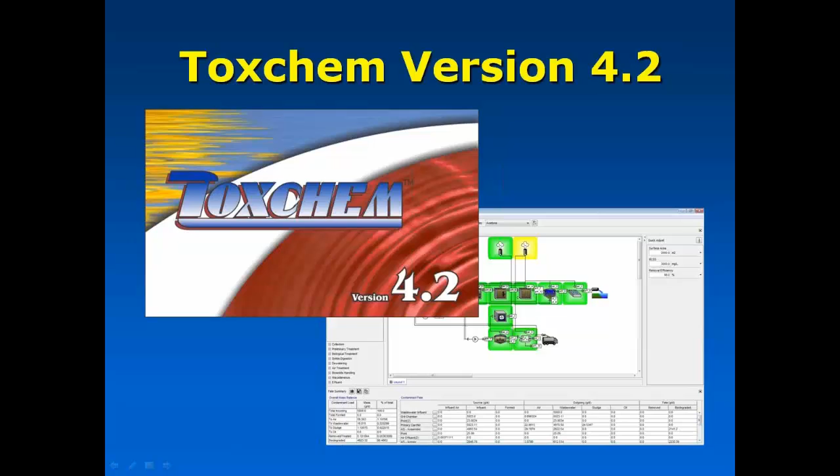So as I mentioned, the purpose of Toxchem is that it's a package that predicts the fate of organic compounds, particularly volatile organic compounds that are of interest, and metals as well, in wastewater collection and treatment systems.

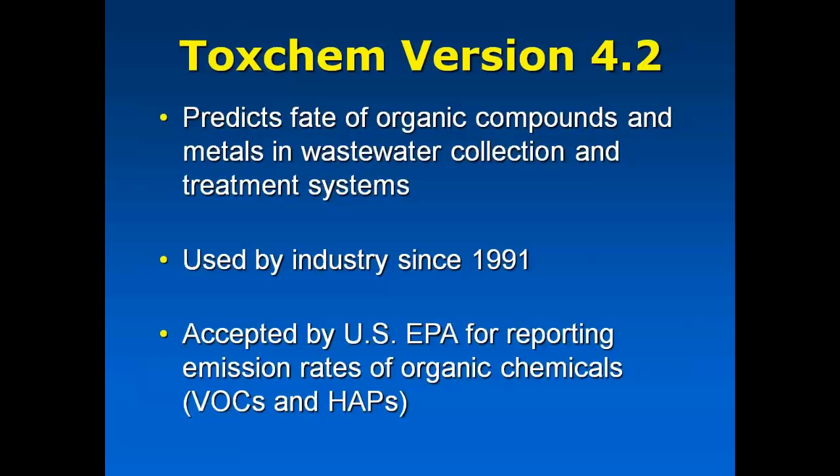As I mentioned, it's been around for some time. It's quite a mature product. It's been in the industry since 1991. Its main use for the most part is that in the US in particular, it's used for estimation and the reporting of air emissions across a number of industries. We have a wide range of users of Toxchem, from consulting companies to industry professionals, universities and colleges, researchers and so on, and the EPA themselves have a license.

These are all different uses across the board, but for the most part, we know that there's a number of people using it to do the reporting of air emissions, but also planning and designing of wastewater process schemes to be able to reduce air emissions. Can we design this plant, or can we operate it differently to get more biodegradation and less loss of particular contaminants, either to the wastewater effluent or to the air?

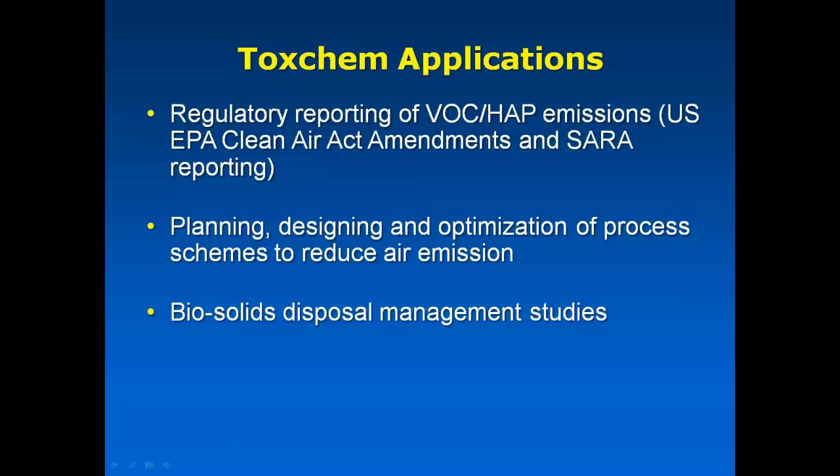There are some people who use it for biosolids disposal management studies, looking at what kind of emissions you're going to get off of different types of biosolids treatment units. A number of people use it in the health and safety sector to figure out what the concentration will be in a capped unit, where there might be some possibility for concentrations to approach hazardous levels or possibly explosive levels. Generally, it can be used anytime you want to track the contaminant mass balance across any type of wastewater treatment.

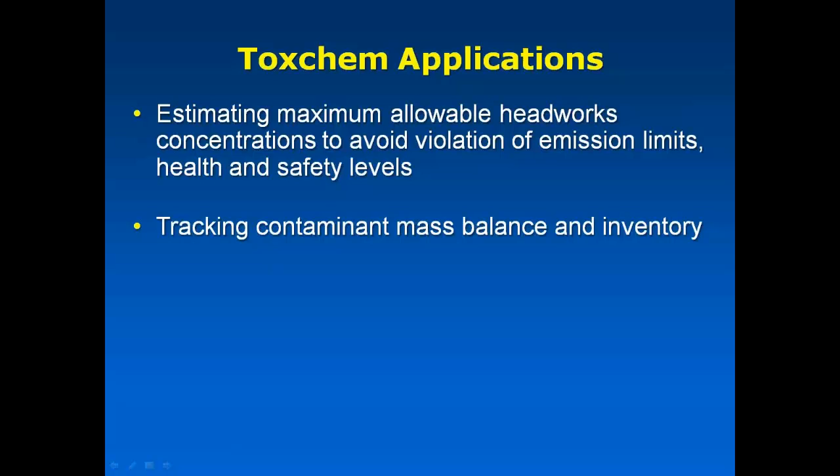So we find that the strengths of Toxchem, as we understand it from our users, is that it's a very mature product, well-tested, well-proven algorithms that have come from a number of different sources and developed over time. We have a very comprehensive model library with over 50 unit processes, which I'll show you here in a moment. Any number of different type of collection system units, wastewater process units, clarifiers, tanks, and different types of wastewater processes.

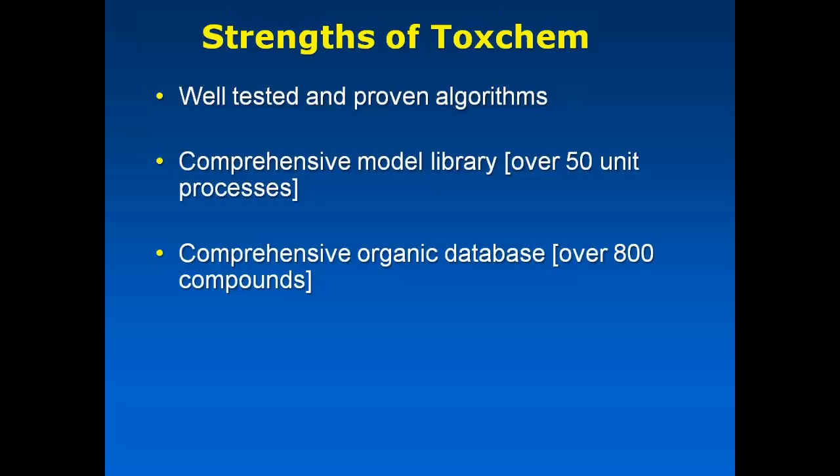And we also have a very large comprehensive organic database of over 800 compounds that you can put into your effluent. We've scoured a number of chemical databases from a number of different sources, so when you sit down to model what's going to happen at your wastewater treatment plant, most likely the things you're looking to put into that effluent will be there, and if they aren't, you can even add new things as you go along.

We've updated the user interface for those who may have seen older versions of Toxchem. It was of a specific style of the time. We've updated it and given it a modern, easy-to-use interface. And of course, it's fully supported by Hydromantis. We offer training and support, and we continue to develop it, and will do so in the future.

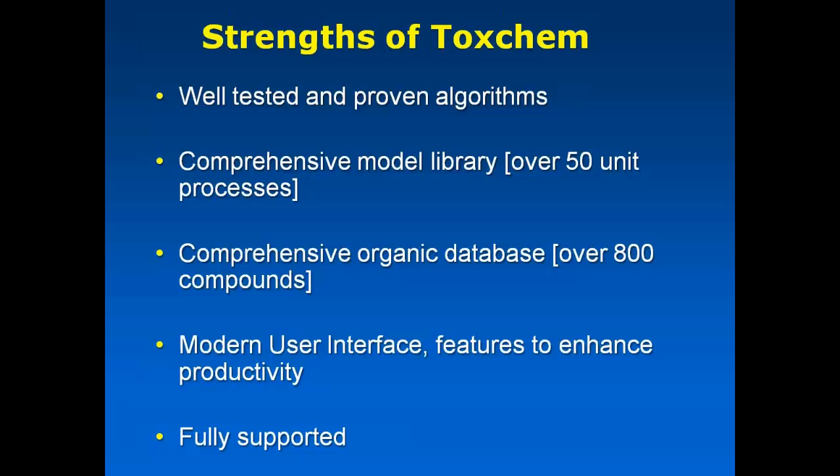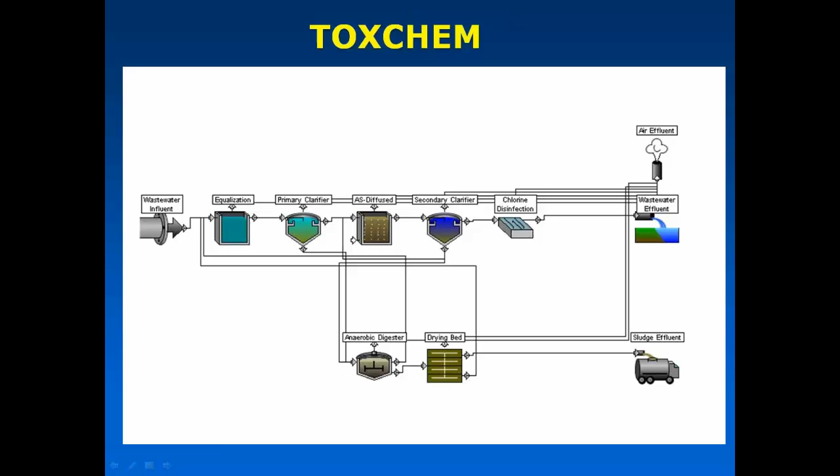So what I'm going to do is just give you a few slides here that's sort of a rough description of what Toxchem looks like and sort of what's under the hood there, just to talk about how we model the individual units, the individual contaminants as you put them into your model. It has several different processes that act upon those contaminants, and it acts upon them each individually. We are, of course, modeling the biodegradation as the stuff comes through the plant.

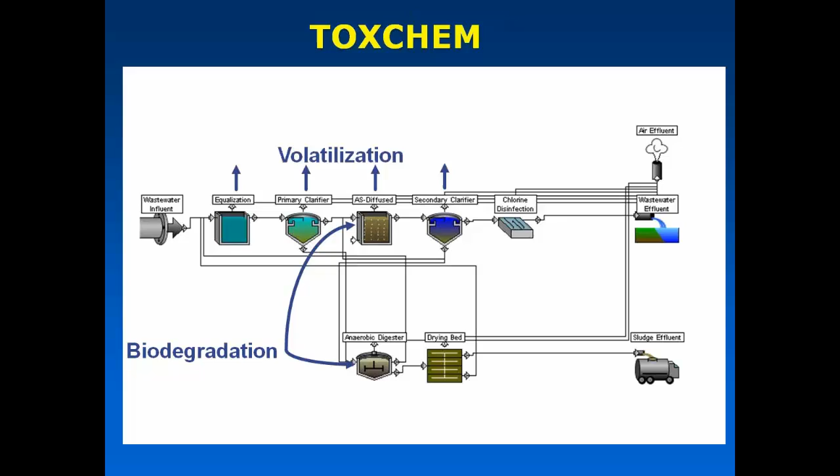Each contaminant that you add has its own biodegradation constant, some for aerobic systems, some for anaerobic systems such as digesters, and there's some level of sophistication in that biological unit. We also calculate through a number of models what the volatilization is, the loss, mass transfer to the atmosphere. And we have sorption models to figure out how much of those components are going to be sorbed onto solids and therefore removed through clarification and treatment and removal of biosolids.

There are a few individual components that could theoretically be produced in a wastewater treatment plant. In any place where that's particularly relevant, we show those. And then we're doing a mass balance on everything, and we can determine after all of those losses have happened, what amount is leaving the plant through the wastewater effluent.

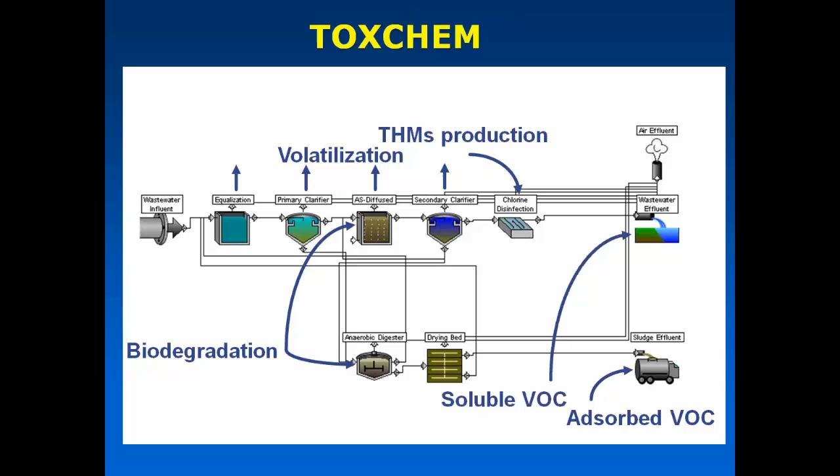So right now, the current up-to-date version of Toxchem is version 4.2, as shown here in this diagram. And as I mentioned, we will have a new version coming out later in the spring or early summer, version 4.3.

Each version of Toxchem allows you to draw out your plant by dragging and dropping a number of individual unit processes from our table, and then you do this on this drawing board. You then hook them all together and fill in a lot of the details for each one of those unit processes. It's all relatively quick and straightforward.

You add your components in, your contaminants that are coming into that plant, and when you run a simulation, we have an overall fate summary down here in the lower left-hand corner that summarizes, plant-wide, how much was biodegraded, how much was lost to the atmosphere, and how much went out in the effluent.

We then have that same kind of breakdown done on a unit-by-unit basis, and this is new in version 4.2. We just added this in the release that came out last fall.

A quick adjust panel means that rather than having to do some calibration or adjustment, a bit of investigation on a couple of the input parameters into the model, say like temperature or size of tank, rather than having to go back and forth, opening menus and changing menu items and then closing them and running the simulation, we've now added this new feature where you can pin a number of those input parameters into this panel, and they'll be there, allowing you to very easily make small adjustments.

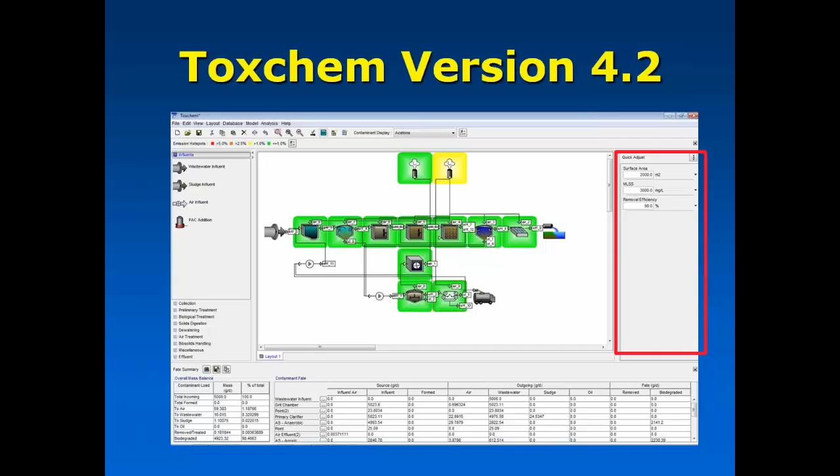We're also very proud of our large chemical database that is used to populate the flow coming into the plant. So I'll demonstrate this and show you some of the details that you can find on this shortly.

We also have what we call our smart visualization of results. So if you want, you can have the results color-coded so that the individual unit processes doing the most release of air emissions to the atmosphere are highlighted in red, with some intermediate yellow and green levels as well. You can control how you want that color coding to happen, what levels you would like, and that can be done on either a mass or a percentage basis.

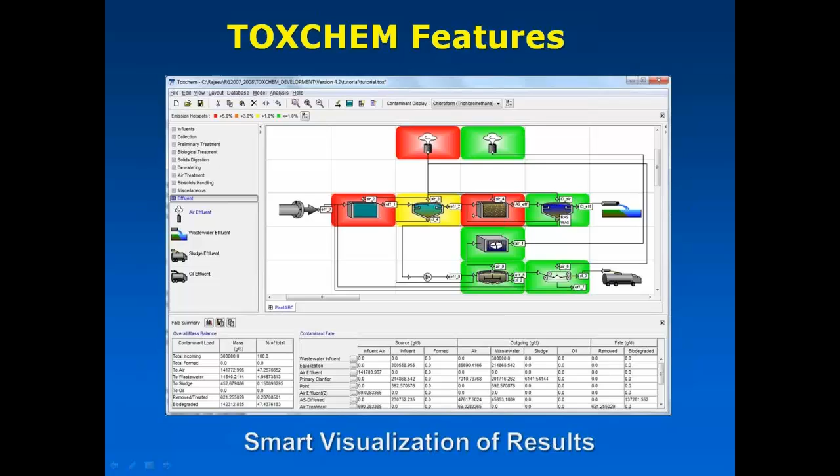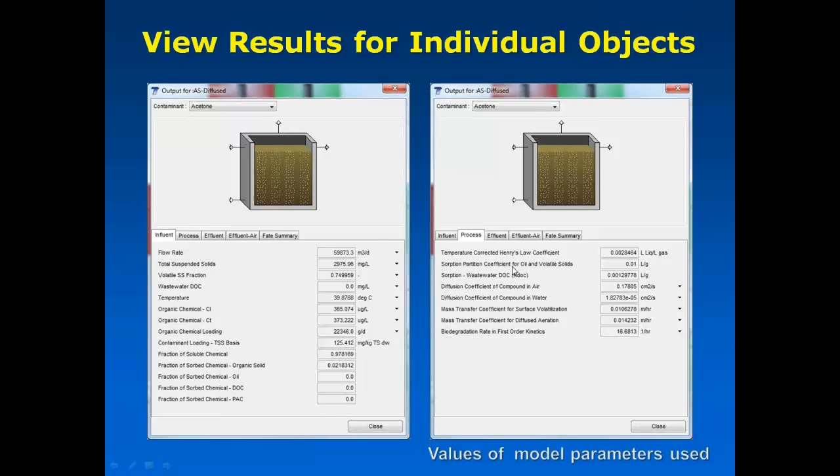So for each unit process, you can take a look at what's coming in once the simulation's done, what models, what values were used. Many of these things are coming from the database and then may or may not be adjusted for things like pH and temperature.

And then you can get an output for each individual unit in terms of what the total air emissions was. This is up at the top here, a percentage of what was coming out for the whole plant, or down below here, total air emissions in a mass flow form.

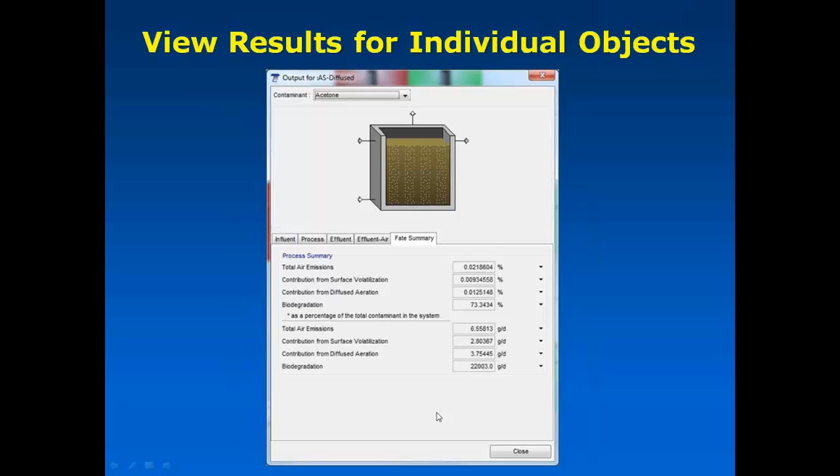So what I'd like to do at this point is hop over to my desktop and quickly demonstrate what Toxchem looks like, and build a plant for you and put some contaminants in it, so you can see how we do this in the software.

So first of all, I'll mention that this is the drawing board that I mentioned earlier. You can see these individual unit processes here on the left. This is our collection of different types of input that we have.

There's quite a number of particular models that you can use for different types of collection systems, open systems, closed systems, drop structures, and so on. We have various types of preliminary treatment, clarifiers and separators and so on, and quite a long list here of different types of unit processes for biological treatment.

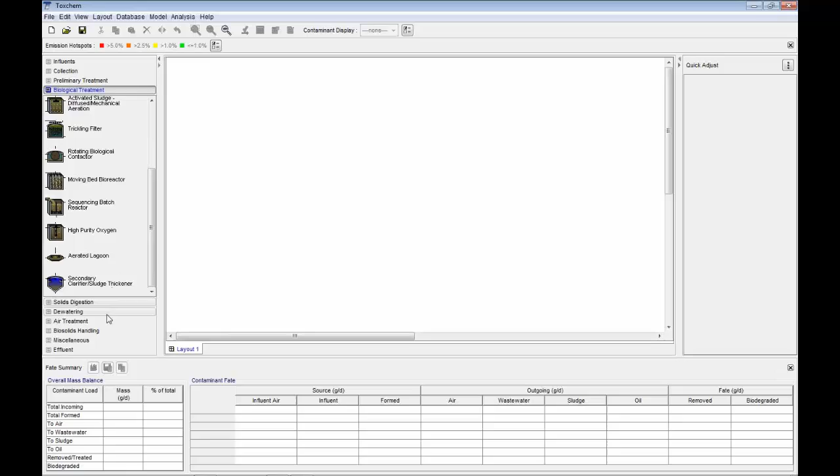That includes sort of conventional activated sludge, mixed and plug flow and so on, and then also some of the things like MBBRs, SBRs, and other specialty units of that type. We have solids for solids handling, digestion, and we even have some air treatment units you can insert as well.

There are different types of solids and biosolids treatment units. These are some of the newer models we just put in with version 4.2, such as the fly ash treatment and the incinerator, and other collections of units used to set up your model in the way that's most realistic for your plant.

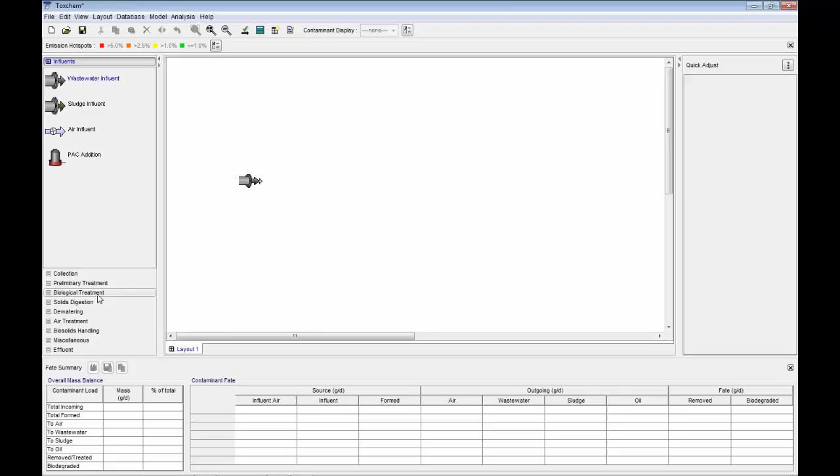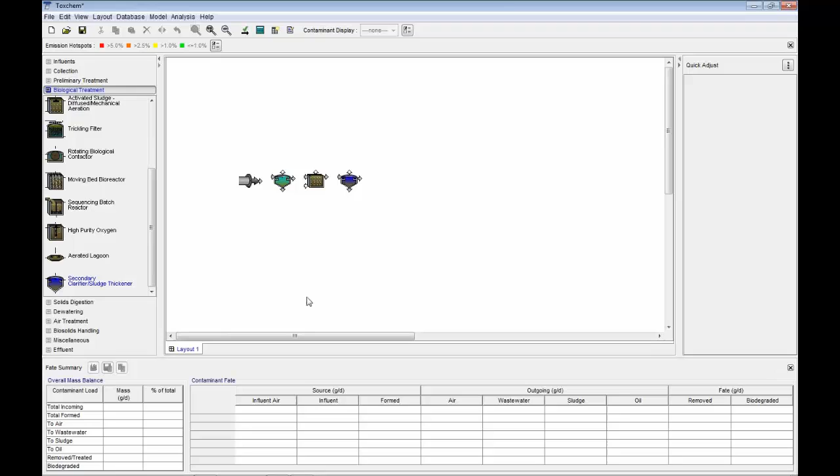So what I'm going to do here is build a very simple wastewater treatment plant. I'm going to drag in an influent, a regular wastewater influent coming into the plant, grab a primary clarifier, and also a biological treatment unit. We're going to pick a diffused aeration activated sludge tank, and slide down to grab the secondary clarifier.

Then I'm going to zoom in on those—there, that's a little better. You'll see that we can hook these things together. You can put them in whatever order you like, and it's somewhat similar to our other software packages, GPSX and CapdetWorks, where you draw out and build a plant of whatever complexity is appropriate, with multiple trains and flow splitting and so on.

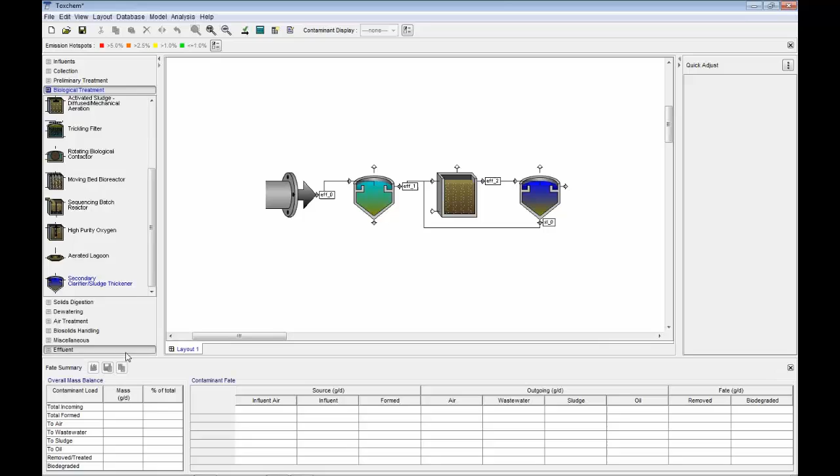The last thing we need to do here in Toxchem is set up some effluents. Because we're focusing on predicting the concentration and mass flow of these contaminants at different types of effluents, that's required. This is supposed to look like a pipe emptying out into a water body, so that's our wastewater effluent.

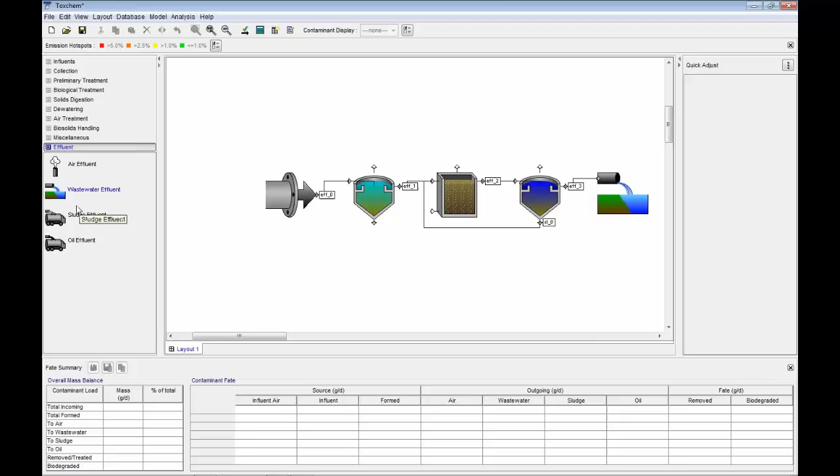We also have to keep track of all our solids, so the primary sludge and secondary sludge come down to this truck doing the sludge haulage. We also have an air effluent, which is a generic unit you need to put all your air effluent into. Any place with an open surface relevant for volatilization goes into one or more of these items, so I'm gathering up all the air effluent into one unit. You can still look at individual volatilization results, but also see them summed in total.

Once you have all of those things in place, we can do a quick check here to make sure we didn't miss any connections. Okay, so we're good.

What we have to do next is specify the characteristics of each one of these units. I'm going to do the influent last, so I'll start by looking at, for example, these clarifier units. We have to specify surface area, depth, and a number of other bits and pieces that are characteristics and physical sizes of those particular units.

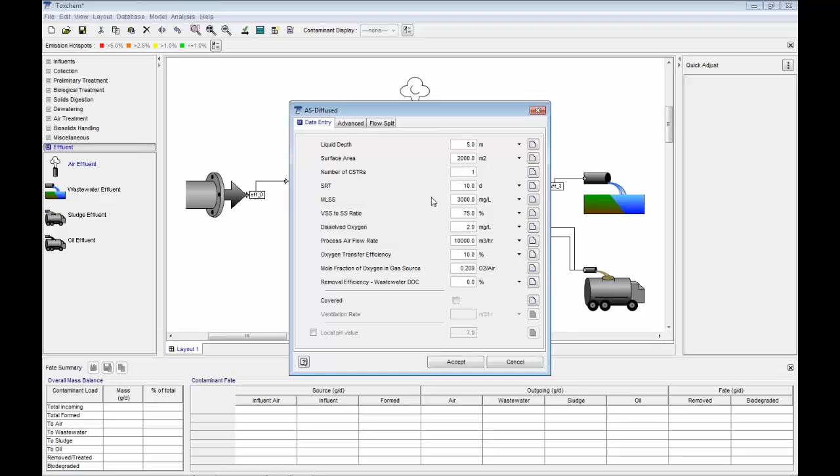There are a few other details here for doing volatilization, and you can use this menu to split the flow if it's going into multiple trains. Each of these menus is different depending on the unit process, but primarily we're concerned with things that allow us to calculate biodegradation, sorption, and volatilization. We'd go ahead and fill all of those in, but I'm just going to leave them at the defaults for today.

Then we have to specify the wastewater influent—here's your flow rate, suspended solids, VSS to TSS ratio, all those kinds of measurements we need for the calculation. Temperature, of course, is important too.

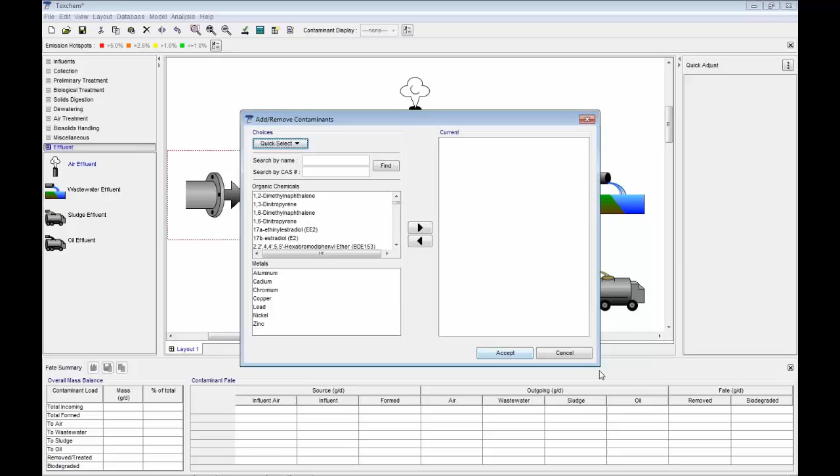Then we pop over to this tab called Contaminants. At this point I can add as many contaminants as I like from our contaminant database. If I make this a little bigger, you can see this table—our organic chemicals table—is the one with the 800 contaminants stored in our database that you can add to the stream. So I'm going to grab a few of these that illustrate different types of fate so we can see.

So first of all, I'm going to grab this estradiol, this natural estrogen, and take acetone, which is highly biodegradable, benzene, which is highly volatile, and triclosan, which is a disinfectant. And let's do a metal as well, so I'm going to select from this table down here at the bottom, cadmium.

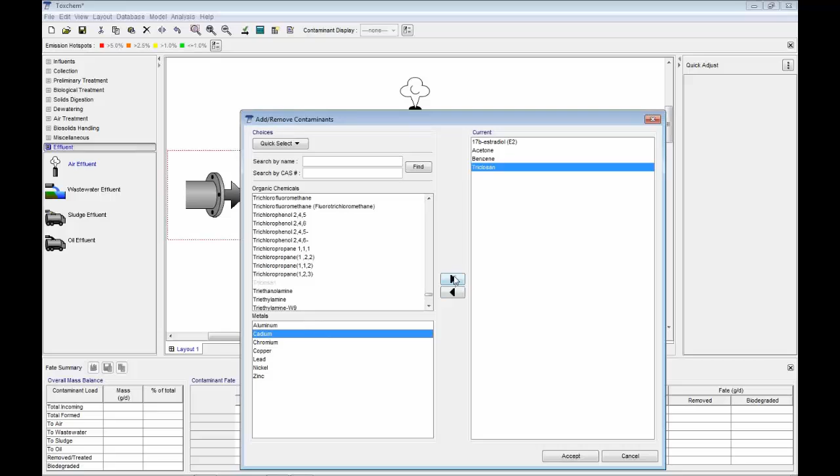So you can put as many as you want, I've seen layouts that have 200 contaminants in there. You can specify their input concentrations here in whatever units you like. I'm just going to leave these all at 100 for now. And then I'm set up to run my first simulation.

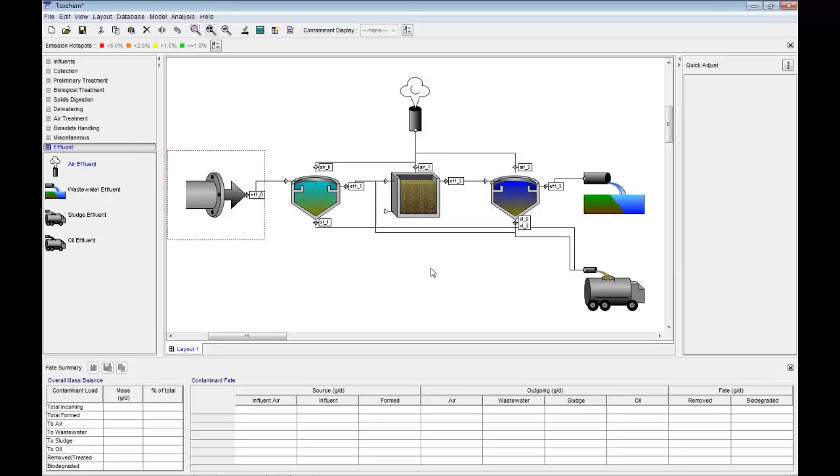First thing I do is click on that button there to do the calculations. It iterates around a few times until it comes to a solution. Now I've got this finished and can look at the results directly, visually, on this screen, by selecting any one of the components I've added to my list. When I flip to benzene here, you can immediately see it had quite a bit more loss to the atmosphere, more volatile emissions than the other things. And of course, cadmium isn't volatile at all.

So if you look in this lower left corner, you can see this is our overall mass balance for the plant. It's a nice quick summary of where everything is going. For this estrogenic compound, for example, we can see that 79% of it was biodegraded, but almost 15% of it was lost to the sludge.

So it was bound to the solids and taken out through the solids handling system. Let's contrast that to something like acetone, which was 95% removed by biodegradation, or benzene, which had quite a bit more, 3 or 4%, lost to the atmosphere. If we look at triclosan, which is a highly hydrophobic compound, this is showing 99% of it was lost directly to being sorbed onto those solids and removed that way.

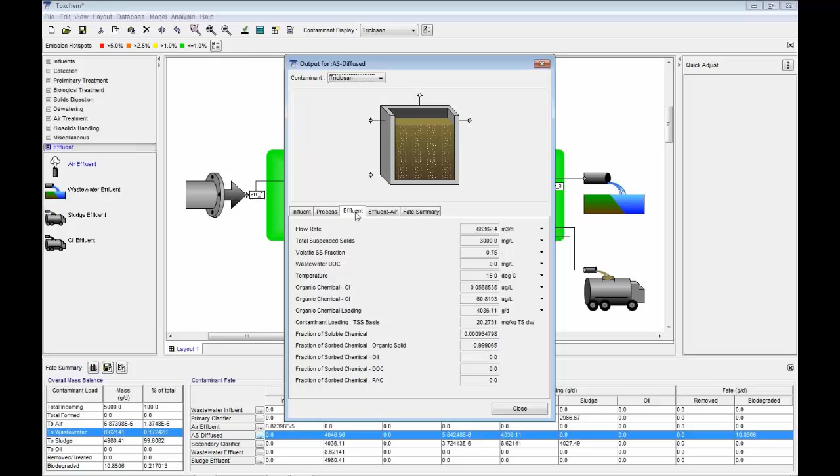You can also get at those images that I showed you earlier here, with more detail in terms of being able to output all the concentrations and flows and other aspects of this model directly right from this table.

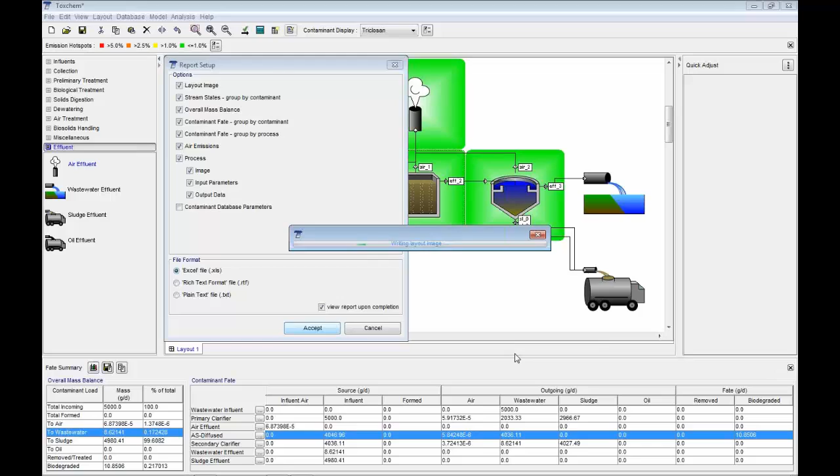Lastly, I'll quickly point out that all of this information can be very nicely exported out by hitting our report button. You can choose which things you'd like to have listed in your report, and there are different formats as well. I'm going to leave it on the Excel file, and just save that out directly. And that popped up over here.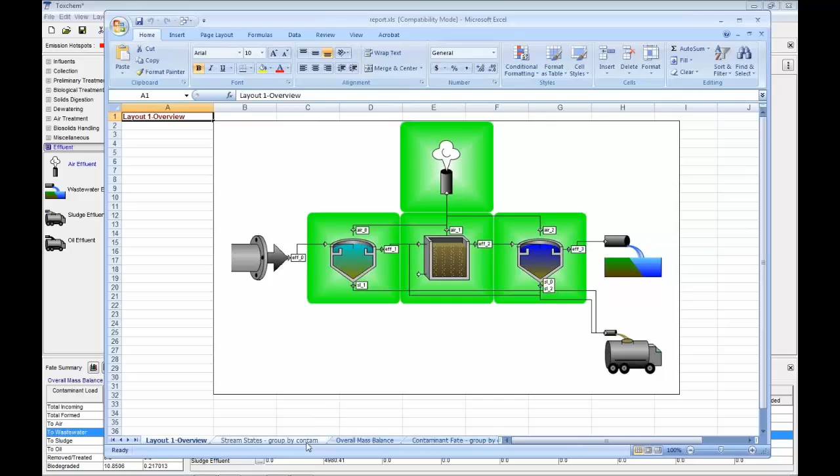I'll drag that over so you can see it. So this is an Excel spreadsheet. This is nice and handy for being able to export images of the graphs and so on directly to your reports that you would like to use.

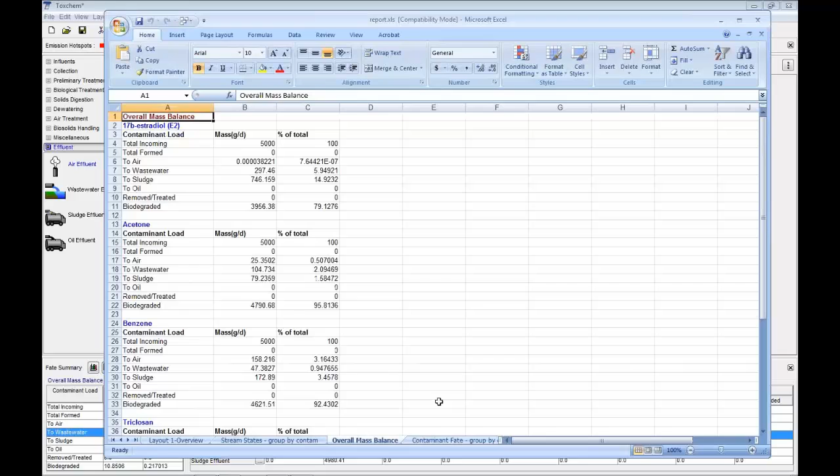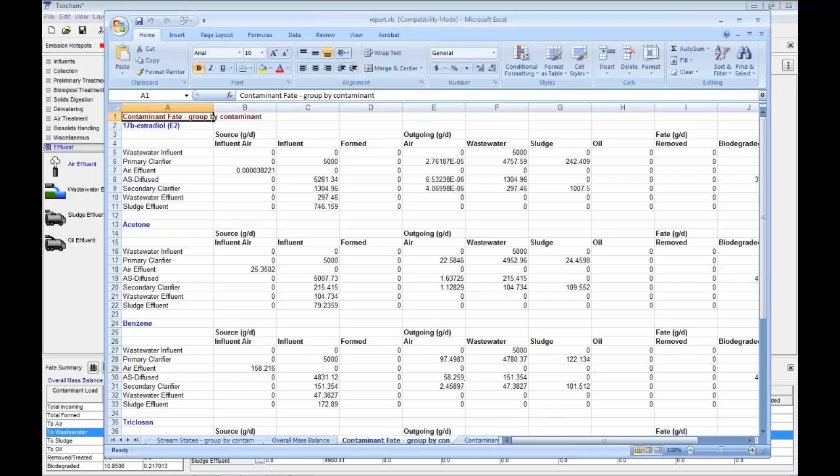And of course, all of the other outputs have been arranged here, grouping them by contaminant, doing that overall mass balance table for each of the 5 contaminants that you have listed there, grouping them by contaminant and so on. So you can get at a lot of the data in many different ways. There are also other reports that you can do that are even more detailed than this, and you can go through all of those possibilities.

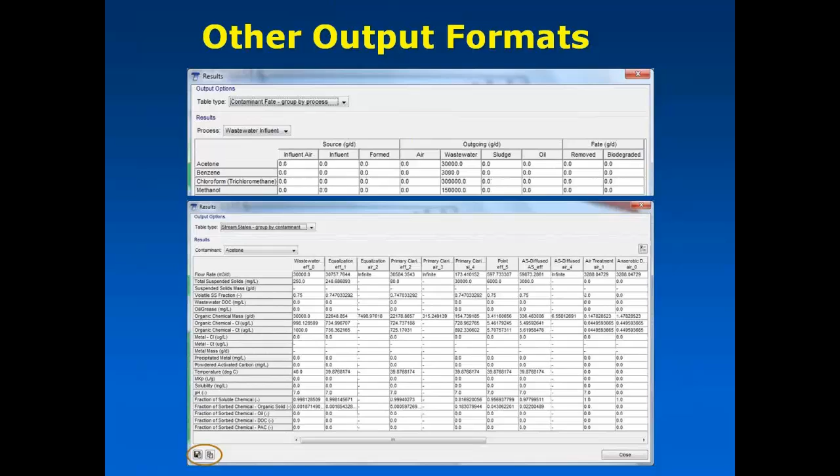And so you can see here we have the different unit processes listed with the contaminants down the side. Many of those things can be adjusted and customized as you see, and exported directly out to Excel.

We also can import data from Excel, which is particularly useful if you have a very large number of influent concentrations to put into the model. If you've added a large number of components through the database, you can set up a spreadsheet with all that information listed in columns, which can be directly imported into Toxchem, and then the results exported out directly.

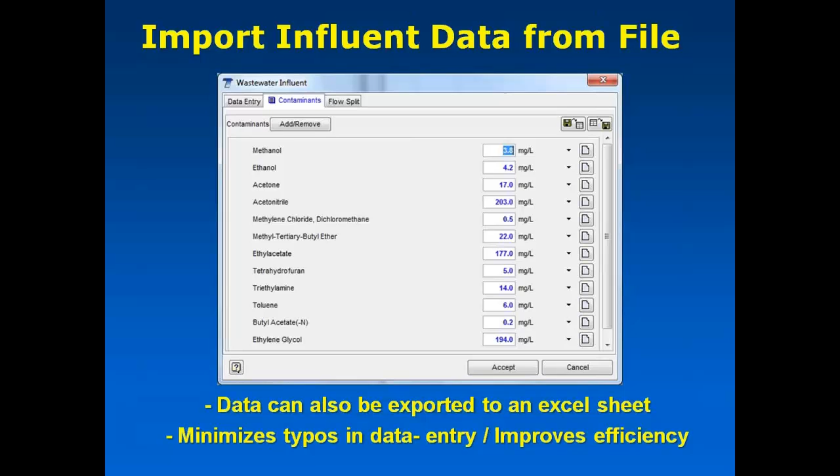Let me pause briefly. I forgot to show the details of our database. If we go to the Toxchem database, you'll note as we scroll through that there's a large number of items taken from various sources. For each one, there's a collection of some of the physical properties of that particular unit.

You can come in here and look at the Henry's Law constant or other models we use to calculate volatilization. For some of these it's not relevant, but for most we have stripping and sorption, using the octanol water partition coefficient or other types of equations to describe sorption.

And of course we have biodegradation. We have more information on this for certain compounds than others. For contaminants that dissociate, we ask you to enter the pH, which we use as part of the volatilization calculation as well.

All the details for these components are listed here, so if you ever need to know where we got information for, say, a biodegradation constant, you can come here and pick up the reference.

So we have a very large contaminant database, but if we don't have what you're looking for, or you'd like to adjust, say, this Henry's Law coefficient, you can create your own. Click Create New Contaminant, and it will copy whatever one you're sitting on, then you can enter new names, new values, and edit the references list to remember the details of what you changed.

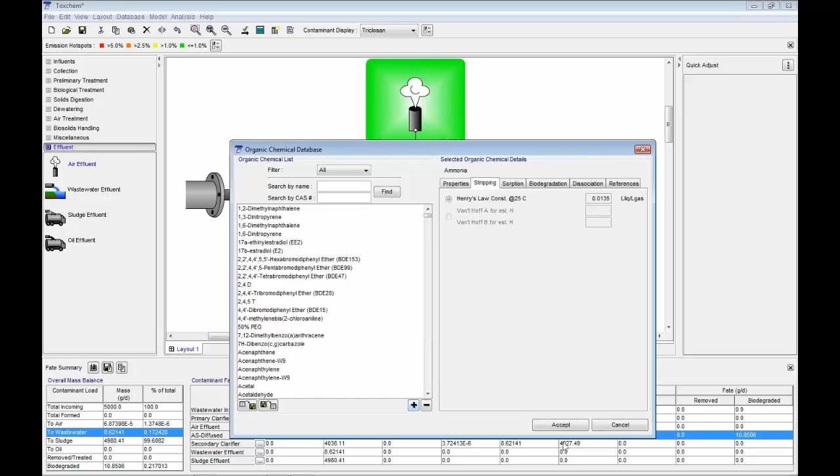Okay, so back to the slides for a few final thoughts. We also have a number of other features in the software, such as an automatic sensitivity analysis tool where you can pick a unit, pick a particular parameter, and look at the results while we vary that parameter over a certain range.

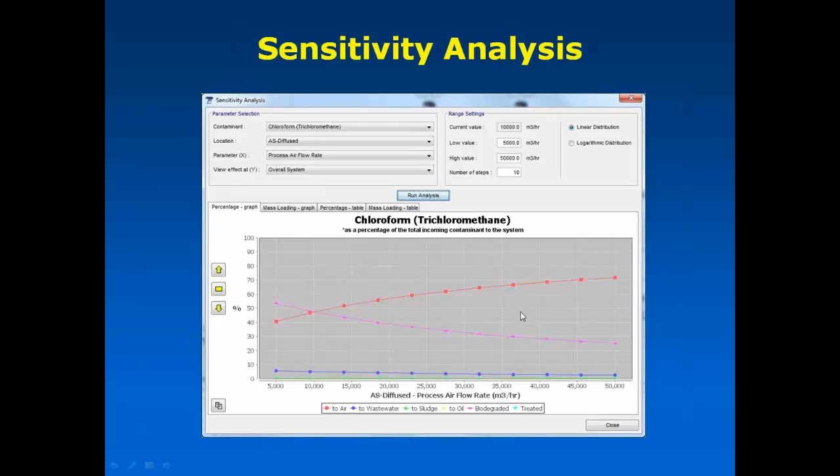We also have the ability to import old layouts from older versions of Toxchem, all the way back to version 3.0. So if you were a regular user before and still have those layouts, they can be imported—not only the layouts themselves, but also the database can be brought forward.

We can now create multiple layouts in the same file. That's often quite useful when doing a what-if scenario, or when you want to compare two different types of designs or operations side by side, sharing the same contaminant database.

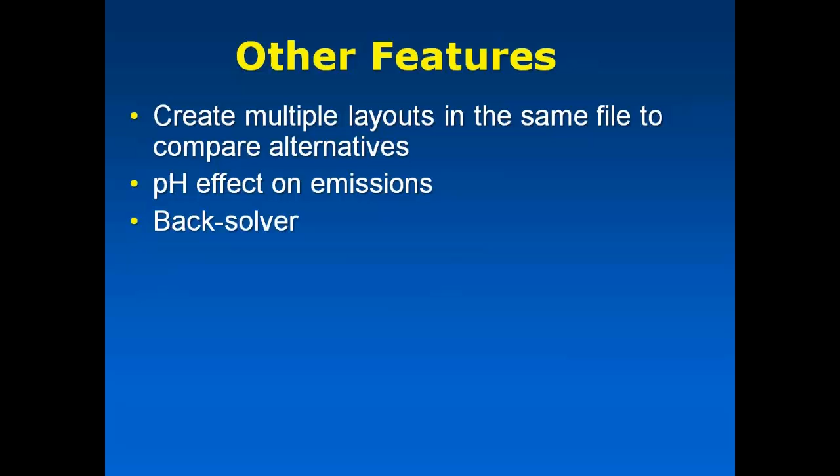We have a number of other features added in the last couple versions of Toxchem. We have the pH effect, used in volatilization calculations, and we've updated and improved the back solver—finding out what influent characterization will give you a specific target effluent concentration.

We've added and updated some biological kinetic calculations, and added some effects for long SRT systems. Most recently, we added dissolved organic carbon as information you can enter into your influent, which can then be used as part of the sorption, so contaminants with a particular affinity for sorbing onto DOC can be included in your model.

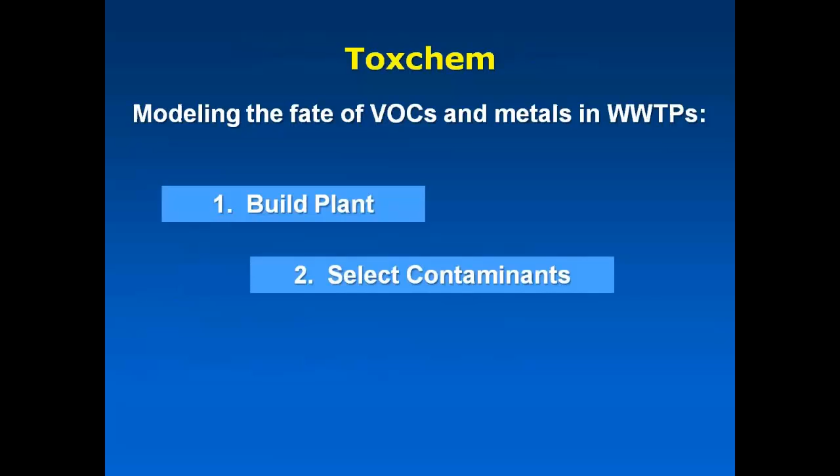So what we have aimed for here is a tool that can be used very easily to build a plant, to allow you to select contaminants from a large and reliable database, and then quickly run simulations so that you can observe.